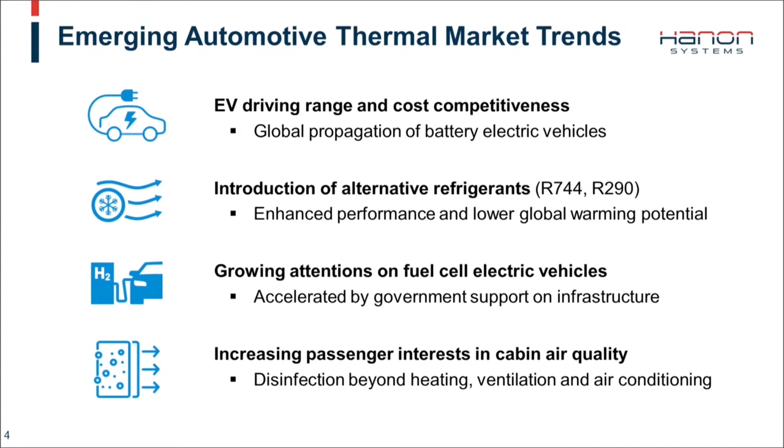Intra-city pollution and the recent COVID-19 crisis have significantly enhanced the public interest in cabin air quality, a field in which our UV LED photocatalyst technology will come to play.

Let me now use a couple of minutes to dive into the long-standing history of Hanon Systems in developing thermal management components and systems. I can look back on over 2 decades of conceptualizing and implementing product solutions that address the needs of automotive customers to meet the trends like the ones I just showed you in the previous slide.

Let's start with the green section, the heart of any thermal system in electrified vehicles, the e-compressor. As early as 2000, certain OEMs and ourselves already anticipated that the transmission belt would not be around forever. In the years to come, our Generation 1 e-compressor was used by over 10 customers for their initial electric vehicle concepts, with serial production starts as early as 2010.

And in 2013, the Generation 3 design was introduced with significantly more volume, followed by the enhanced Generation 4 design in 2019. Next year, we will launch the next generation of e-compressors.

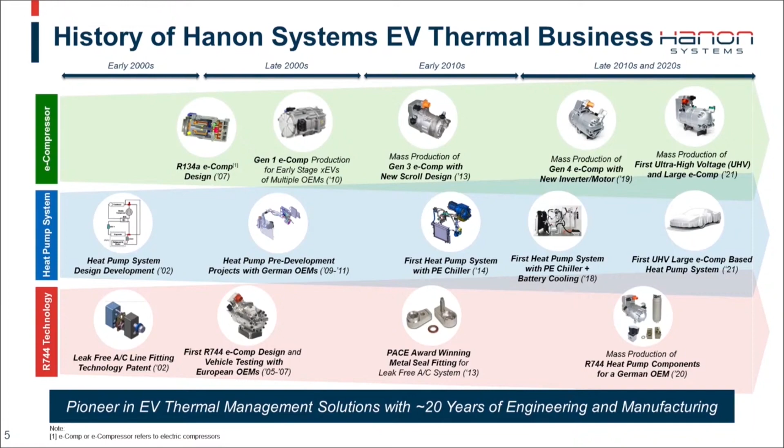Earlier on, I showed you our position in the overall arena of automotive thermal systems. Now I want to take some time and focus on our success with the heart of the system, the e-compressor.

Of the 4 key players I mentioned earlier, only 2 of them dominate the e-compressor market with a combined 67%, or 2/3 of that business. And it gives me special pride and joy to say that with 25%, we hold the lead in the non-captive segment of this dynamically expanding market.

When we look at what that means with regards to sheer product volumes, you can see that we will double our volumes within the next 2 years.

This is also due to the aforementioned introductions of the R744 e-compressor and the ultra-high voltage large displacement compressor. And by 2025, we will more than double our e-compressor volumes again, all the way up to 4.4 million units annually. So you see that the electrification wave throughout the automotive industry and our diverse customer base is showing its effect.

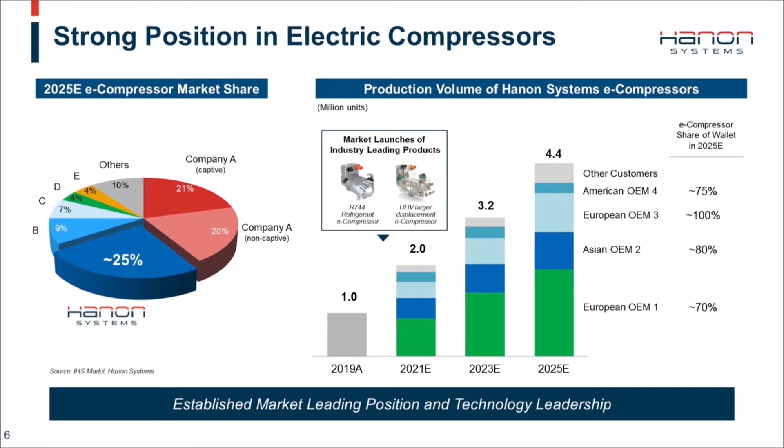Our team also did a fantastic job of developing and introducing the battery thermal management system on the Porsche Taycan, and the Mercedes EQC and Jaguar's premium vehicles complement the presence of Hanon Systems in Europe.

Traditionally, Hyundai has been launching its electrified vehicles with Hanon Systems components, and this customer is continuing to source thermal management system solutions from Hanon Systems for its battery EV dedicated platform, starting with the Ioniq brand.

Our solid presence at Ford, the increasing share of Fiat Chrysler's electrified vehicles, as well as the Rivian R1T and the Lucid Air demonstrate the acceptance of Hanon Systems thermal management expertise in the Americas region.

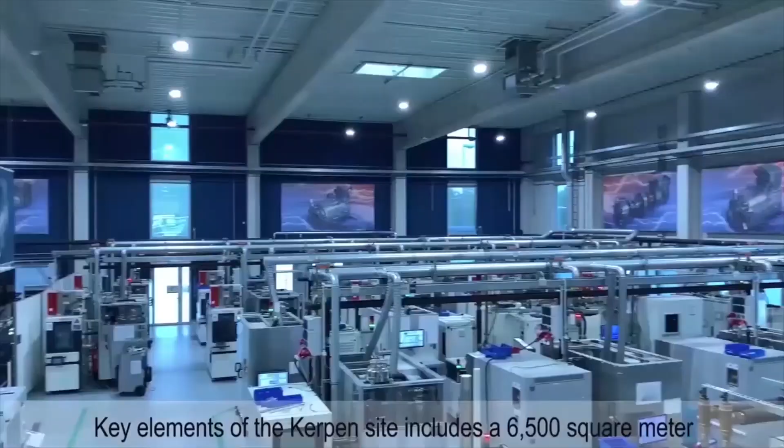Key elements of the Kerpen site include 6,500 square meters of component and system test space and a climatic wind tunnel for system and vehicle testing.

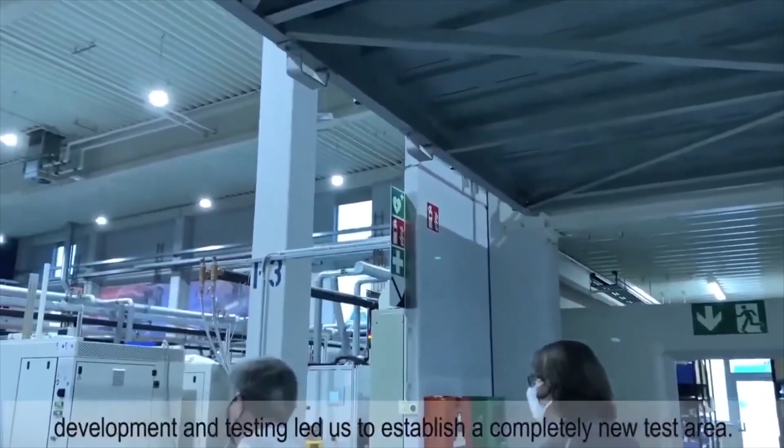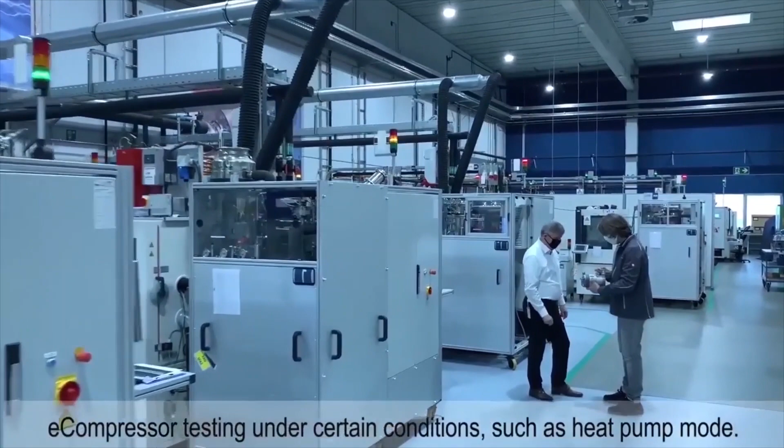Because of our success in e-compressors, the surge in demand for development and testing led us to establish a completely new test area. This was developed completely in-house to match the specific needs for e-compressor testing under certain conditions, such as heat pump mode. Because of the modular design, all stands are capable to run with all types of refrigerants.

Including R134A, R1234YF, R744, R290, as well as the various voltage levels that range from 48 to 800 volts.

By application of modern simulation tools and the latest acoustic analysis techniques, sound characteristics and noise level of systems and components from Hanon Systems are optimized from concept development up to vehicle-tailored solution.

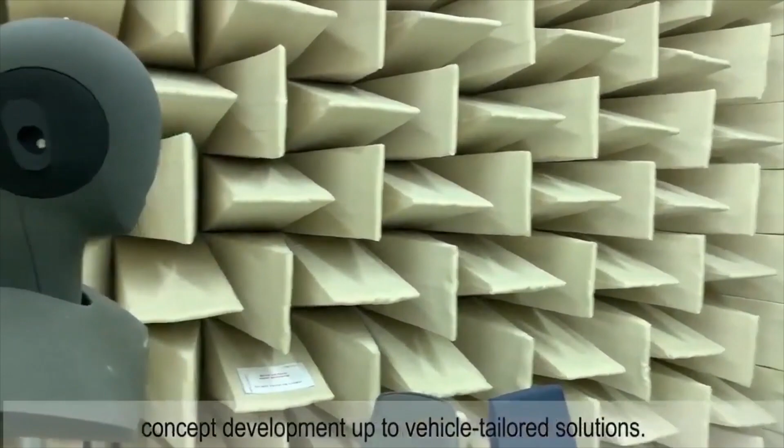Finally, the climatic wind tunnel is equipped with a 4-wheel chassis dynamometer, allowing vehicle speeds up to 250 km per hour. At the Europe Innovation Center, we are passionate in our efforts to deliver eco-friendly technologies that will help create a better world for future generations.

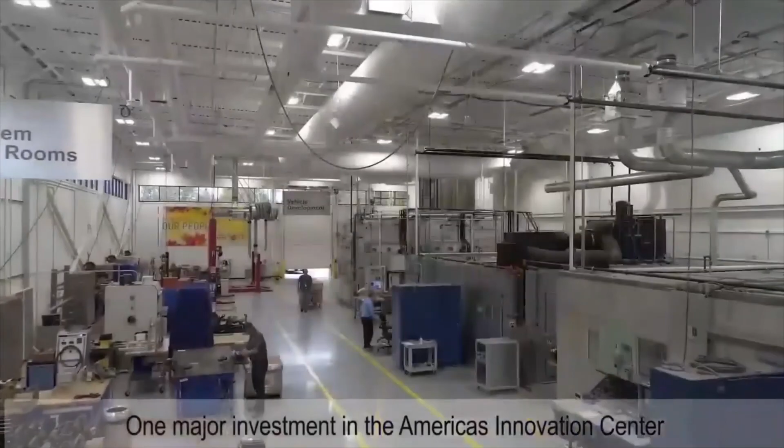One major investment in the Americas Innovation Center surrounds system-level testing. The system durability stands are capable of testing complete thermal management systems over the simulated life of the vehicle.

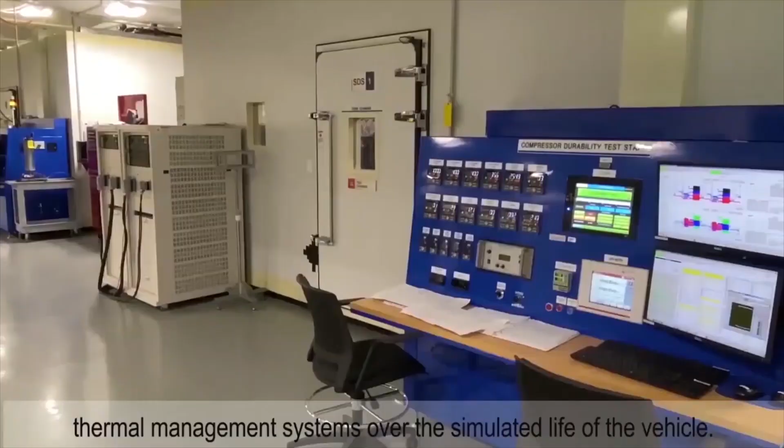We will also be launching a state-of-the-art system test room that will be capable to run a number of configurations, including heat pump and dual or multi-loop thermal systems.

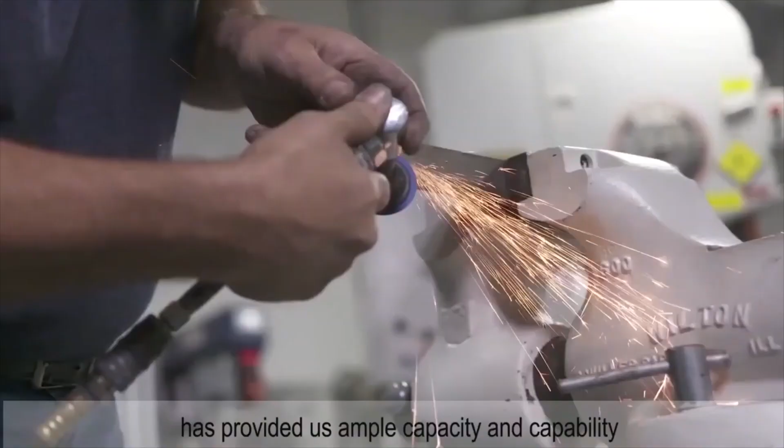Our work and investment on noise, vibration, and harshness, or NVH, has provided us ample capacity and capability to conduct all of our testing in-house for all product lines. Our test procedures are based on global correlation and standardization in order to have alignment across regions.

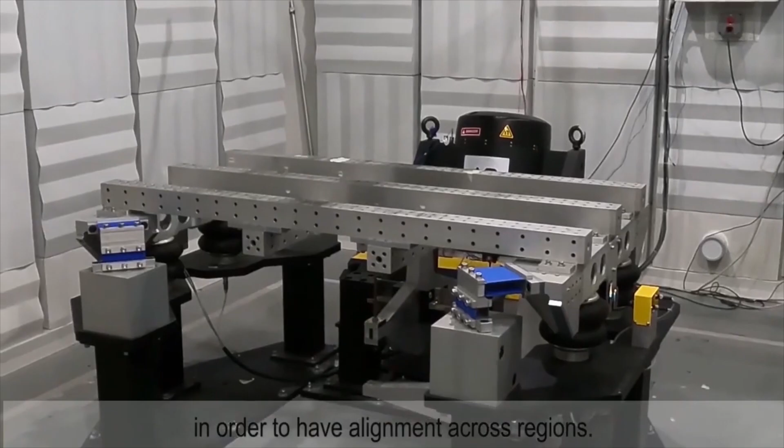In closing, Hanon Systems remains committed to focusing on high-impact investments to support the company's vision to be a leader in innovative thermal and energy management solutions.

In just a short time, the Americas Innovation Center itself and its people have proven our ability to improve on our expertise, execution, and delivery to really focus on the customer and their success. Thank you.

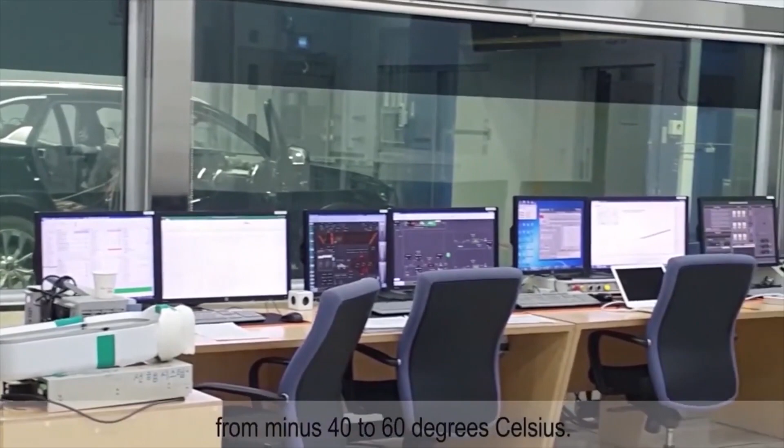It is equipped with a 4-wheel chassis dynamometer, fan capable of generating wind speeds of up to 250 km per hour, temperature and humidity controls, and solar panels to simulate sunrise and sunset.

Here at the Asia Pacific Innovation Center, we take pride in our effort to deliver automakers innovative thermal and energy management solutions and are driven to see our customer success.

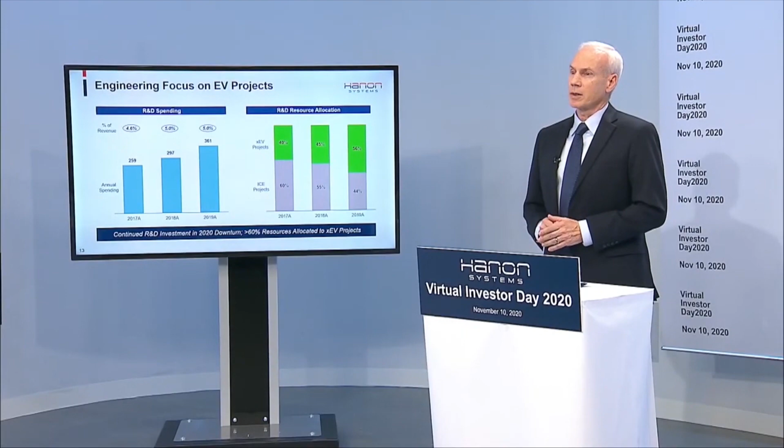Here we outline our engineering spend and resource allocation. The left chart shows our R&D investment increasing from 2017 up to 2019, and we're maintaining the engineering spending this year even through the market downturn.

On the right side, the chart outlines our engineering resources shift to electrification. We have increased from 40% of engineering staff working on e-mobility products in 2017 to 56% in 2019, and we project over 60% this year.

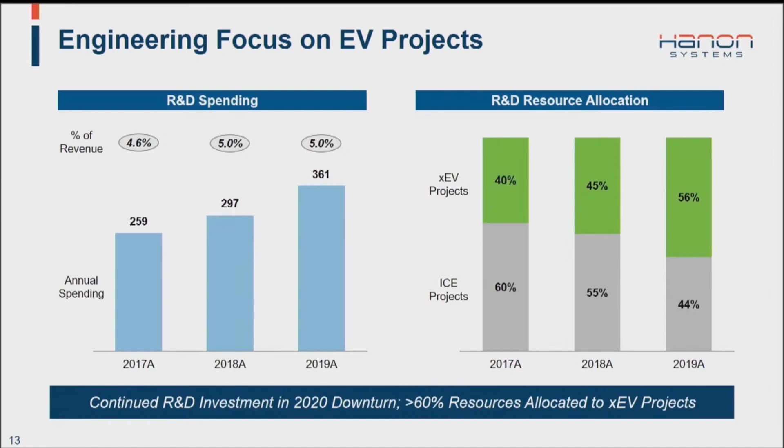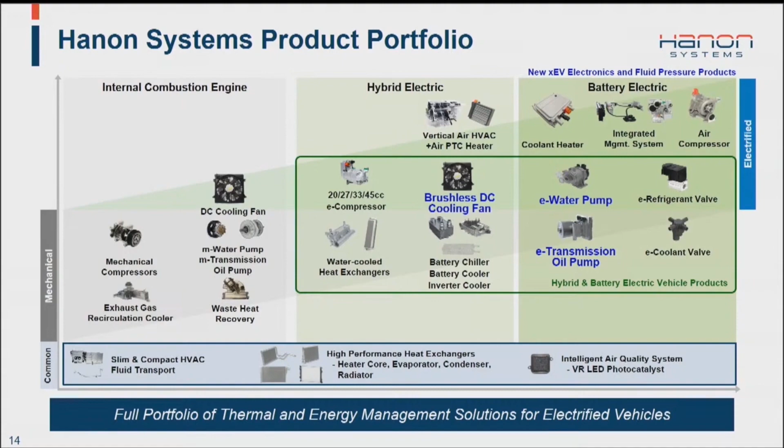We've added 3 new EV products, shown in blue, to bolster our offerings to the automakers. This includes the engine cooling fan with a brushless direct current motor, a complete electric water pump lineup, and electronic oil pumps. This makes for a full portfolio of thermal and energy management components for electric vehicles.

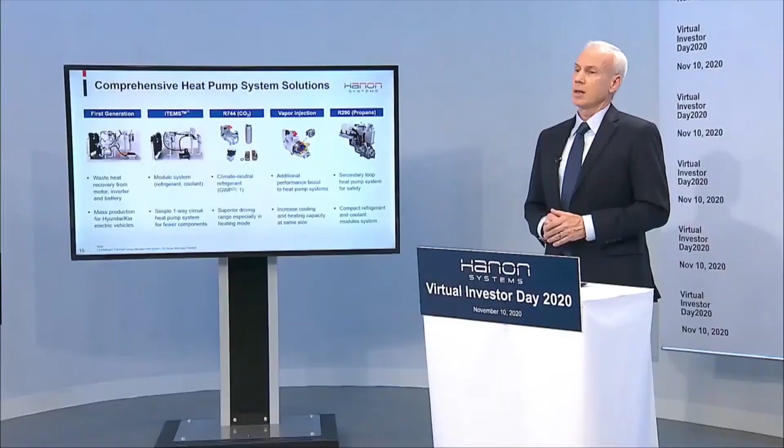We also have a comprehensive portfolio of heat pump solutions, starting with our first generation heat pump system, which has the attention of many OEMs around the world, and our one-way refrigerant loop system that uses fewer components, and our CO2 system, which Nerdal already mentioned, and our developing vapor injection system, which adds additional cooling capacity in nearly the same packaging size, and a new developing R290 system, which is propane-based and utilizes a secondary refrigerant circuit.

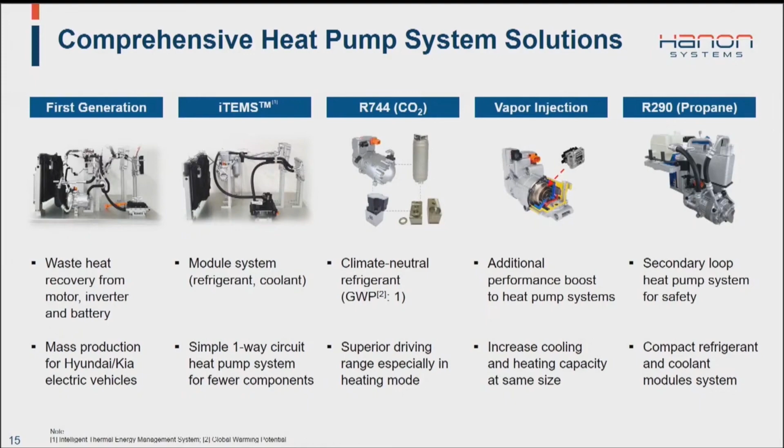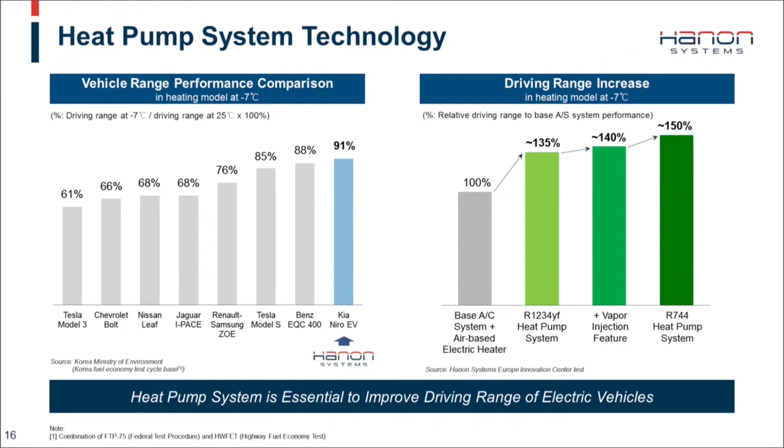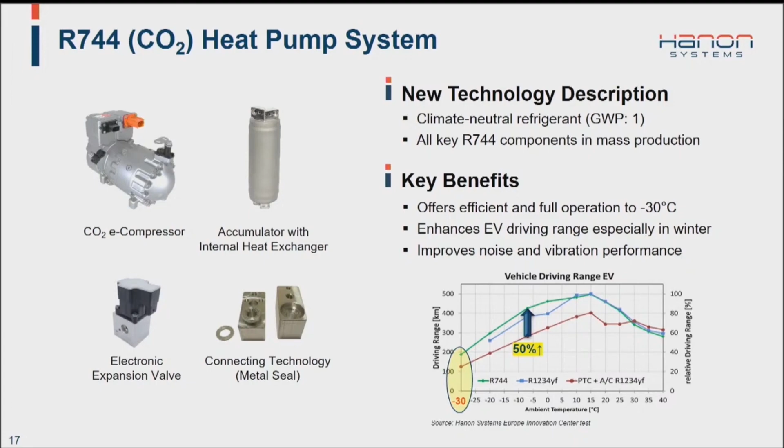I'd like to highlight our CO2 heat pump system, where we offer a complete portfolio of components. R744, or commonly called CO2, is a climate change neutral refrigerant. This system has outstanding heating mode operation all the way down to -30 degrees C, which can increase cold weather driving range by 50% over a base AC system. In addition, the E-compressor offers outstanding performance through its low noise and vibration design.

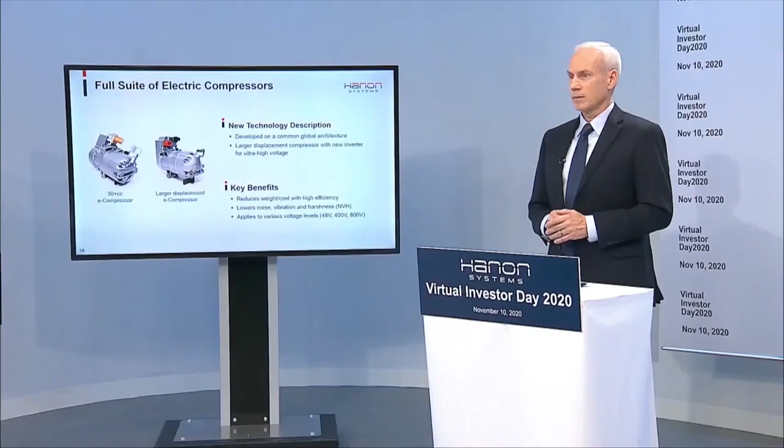We're also expanding our electric compressor lineup. In addition to the 33cc compressor, we're adding a new large displacement compressor to meet the increased demand for cooling capacity driven primarily by fast EV charging requirements. And we have expanded the operating voltage to include 48 volts all the way up to 800 volts to make for a complete portfolio.

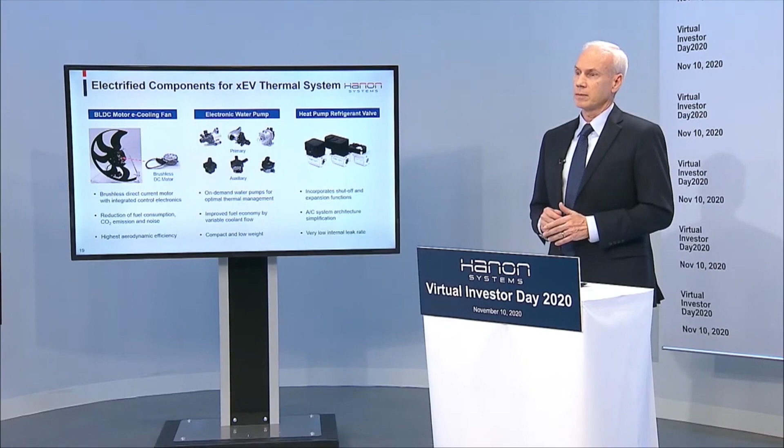There are three other technologies I'd like to highlight for electric vehicles. I mentioned on an earlier slide the brushless DC cooling fan motor. This reduces energy consumption, which is a key requirement on electric vehicles.

We've also added a full lineup of electronic water pumps, both EV auxiliary pumps from 35 watts up to 250 watts, and hybrid primary pumps from 250 watts up to 1.8 kilowatts. We also have a full range of highly advanced refrigerant valves that incorporate both a shutoff feature and expansion feature into one valve, and this simplifies the refrigerant circuit.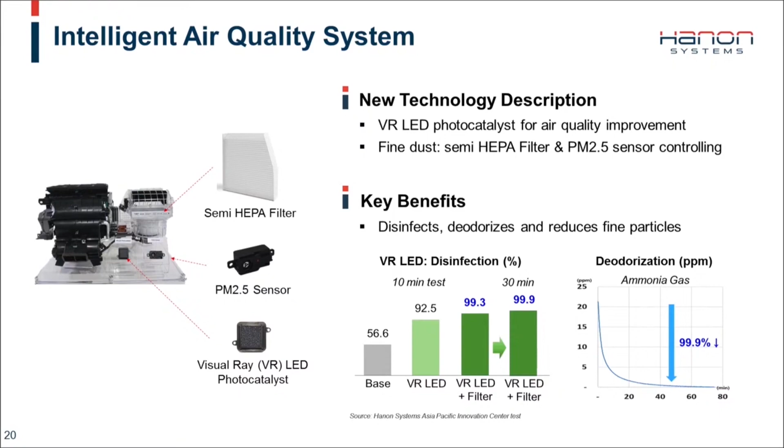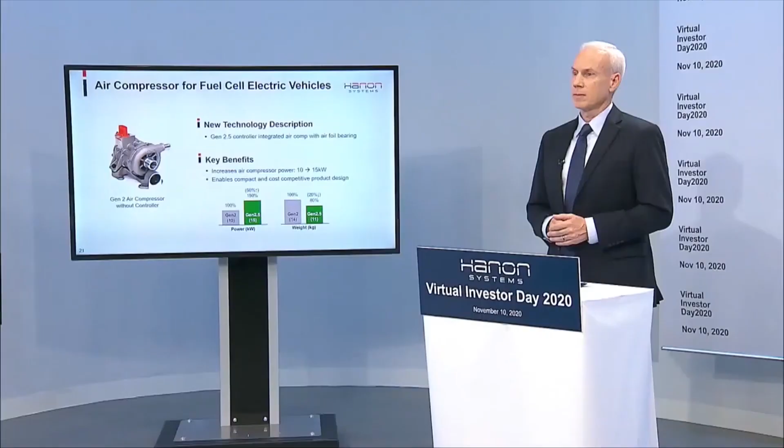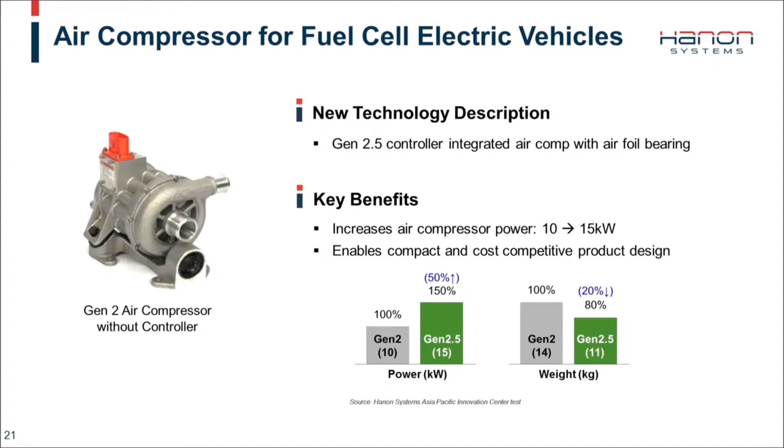Our fuel cell air compressor is in production and on the world's first fuel cell heavy-duty truck. We're now working on our Generation 2.5 air compressor that will have increased power from 10 kilowatts up to 15 kilowatts, and at the same time, we are reducing mass from 14 kilograms to 11 kilograms. The result is a high capacity and very low mass air compressor.

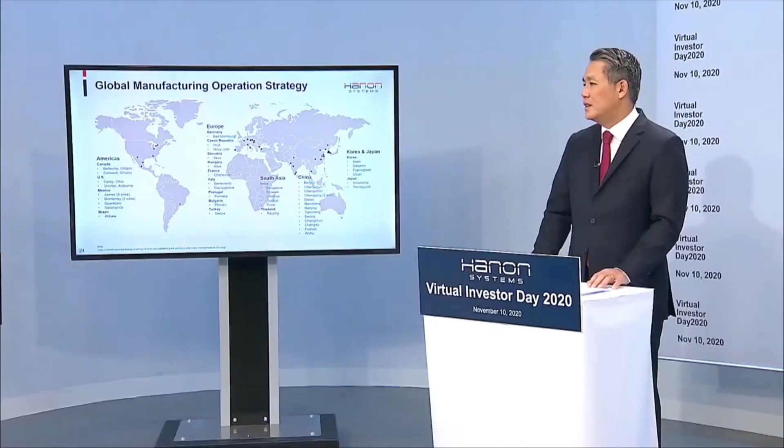First, recapping on my manufacturing discipline of the footprint in 4 pillars, that's on the screen. There are as many as 51 manufacturing sites around the world producing different product lines. Since the separation from Visteon, we have been focusing on expansion of new sites in line with growth, while restructuring and right-sizing some of our legacy plants, which we have updated you on many times in previous engagements.

This time, I would really like to introduce our activities around the electrified product expansion, as well as transformation of the existing manufacturing sites based on the increasing demand of new products going forward.

Obviously, electric compressor is a critical one that's leading the technology shift, and also requires significant capex, especially in Europe and China, for the expected growth.

As for Palmela, phase 1 is completed, and it's already preparing for phase 2, given the sold out of the installed capacity and increasing demand of higher tech versions, such as ultra-high voltage and R744.

Primarily for the European market. If you look to Asia, mainly China, we've also installed 1.1 million electric compressor capacity in order to support the local growth.

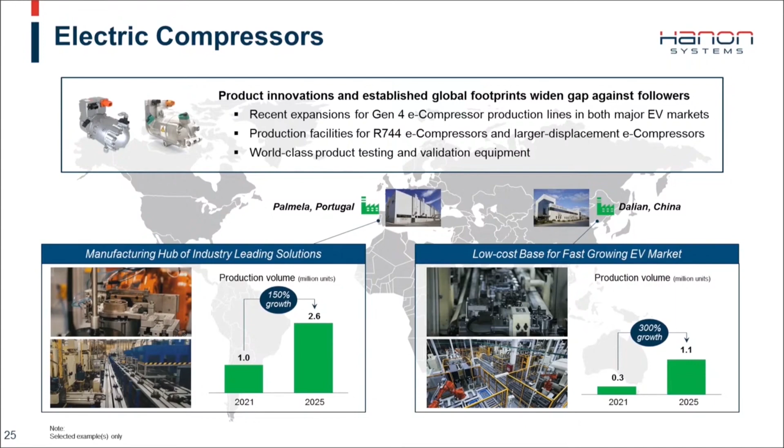But as always, the process and setup is fully optimized for the local economics, while the critical processes are completely identical across the board in all of our compressor manufacturing facilities.

Next is the other key growth area for both ICE vehicles and EV vehicles, including hybrids. This is obviously the area that Hanon Systems was lacking, but we closed the gap by acquiring Magna FP&C, now Hanon Systems EFP product group.

Early in 2019, we had started installing additional capacity for Hanon Systems immediately after the transaction, not to miss the last window of the initial wave of the BLDC shift.

That's already paying out as confirmed growth through 2025 and still winning more volume given the synergy of Hanon Systems' legacy fan and shroud with the new BLDC motor, and it is further expanding as part of the China market growth out of our Changzhou plant.

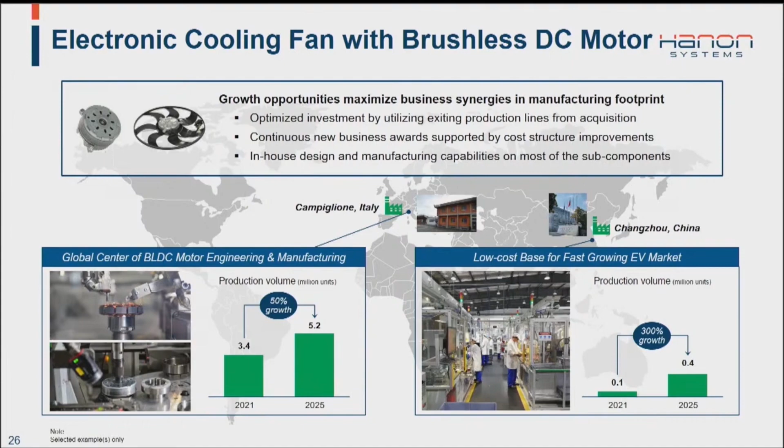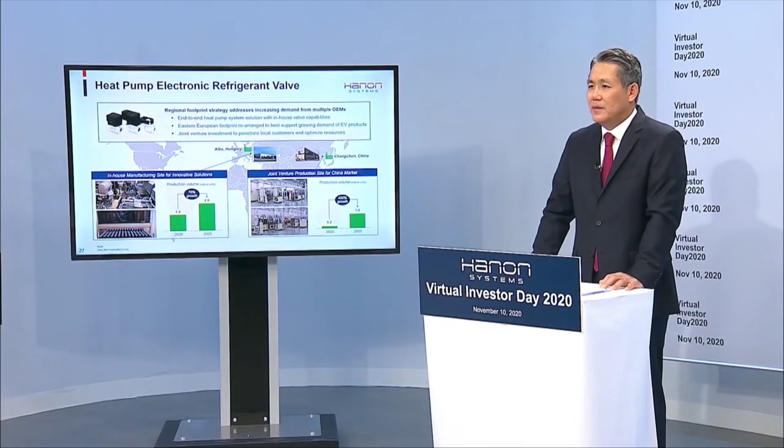Lately, there's a huge recognition of the heat pump system, and we're very proud of the new valve technology, which will be introduced first from the Alba, Hungary plant, leveraging off of the precision machining and assembly expertise in that plant, as it requires highly sophisticated controls in order to produce good quality parts. That's why we expect to have strong market leadership for a very long time.

Just like the electric compressor business, we have a strong penetration through a joint venture partner for the China market, and it's very strong in terms of local market demand.

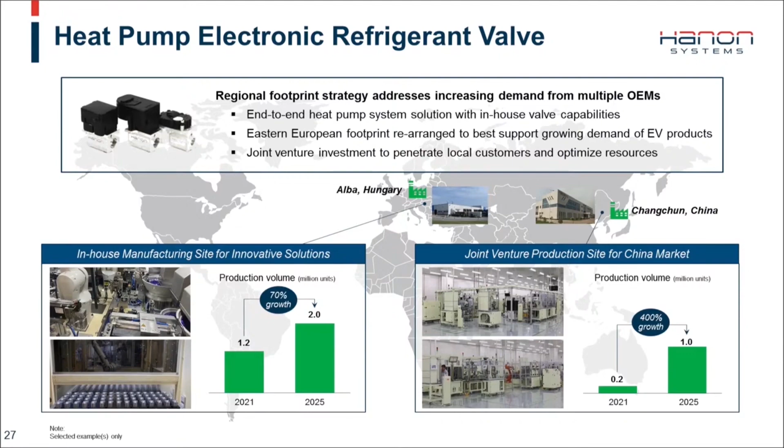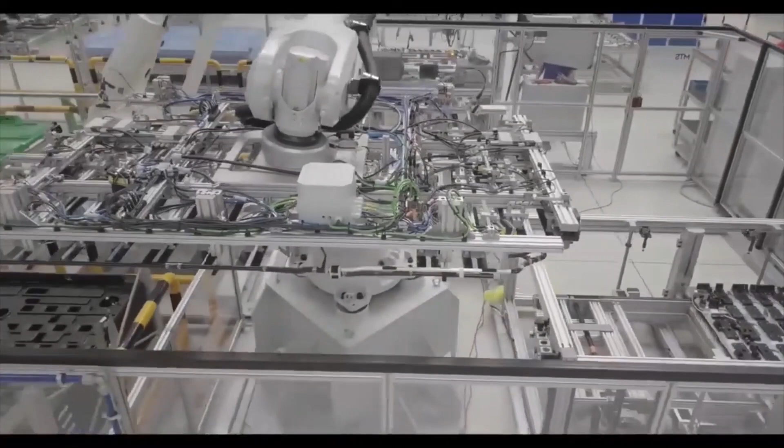Finally, I personally like these cases the best, as we have not only avoided restructuring, but also completely transformed the manufacturing plant to a futuristic setup for long-term viability, which otherwise would have faced continuous downsizing till closure.

Here's the video again.

Hello, I am Eduardo Treviño, Managing Director of the Hanon Systems EFP Monterrey in Mexico. You may know the EFP Monterrey plant was part of the fluid pressures and control business of Magna, acquired by Hanon Systems in 2019. I would describe the time that followed as a smooth integration for us.

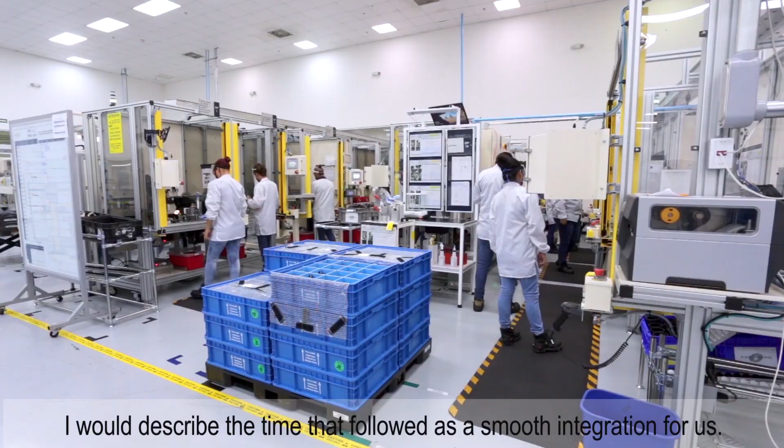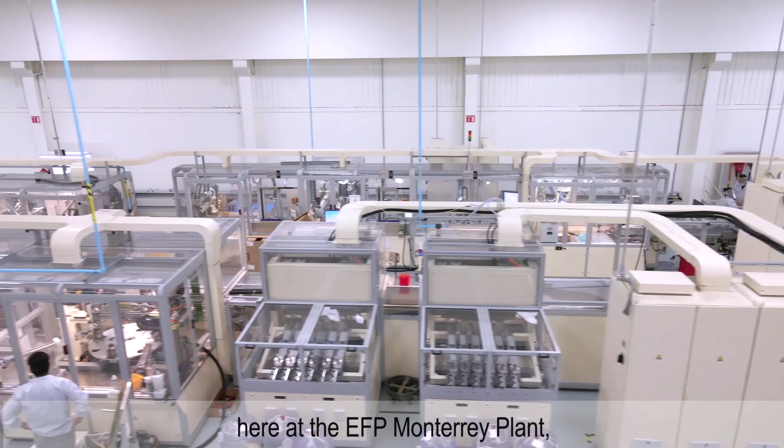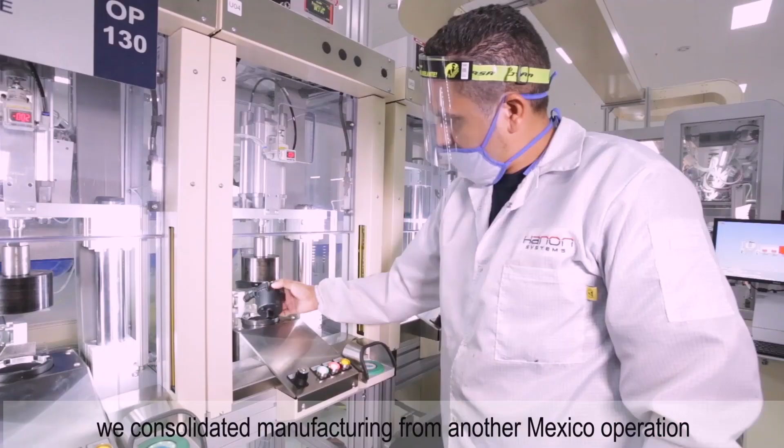We were able to quickly adapt to the new processes and systems with no customer disruption. Today, we produce and ship more than 5 million end items each year to many of the world's major automakers. In the short time since we joined Hanon Systems here at the EFP Monterrey plant, we are experiencing a transformation to our operations. Where originally we were focused almost solely on mechanical solutions, we consolidated manufacturing from another Mexico operation that allowed us to accelerate our transformation into the regional hub of electronic water pumps with our strategic investments to support electric vehicles.

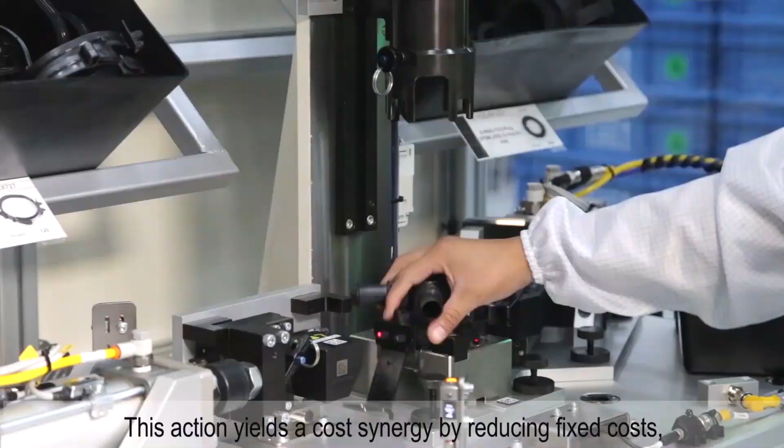This action yields a cost synergy by reducing fixed costs, allowing us to achieve economies of scale, and generates more than 200% increase in electronic water pump production over the next 3 years.

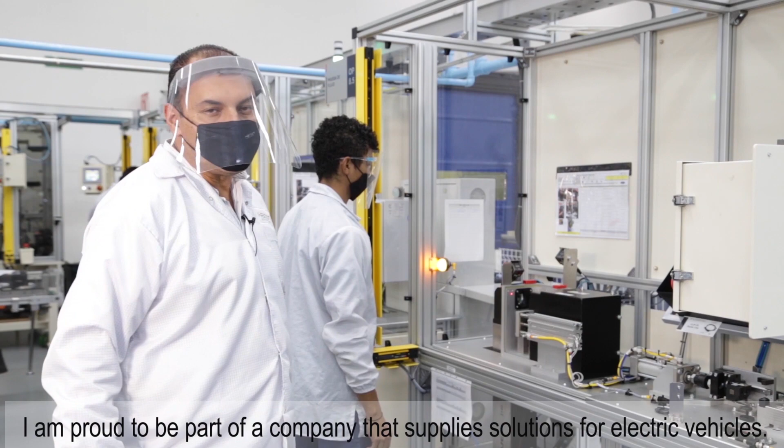I speak for everyone here at the plant when I say, I am proud to be part of a company that supplies solutions for electric vehicles. It is rewarding to know our efforts are helping the environment and building a better future.

Certainly, I saved the best for last, and it is Charleville, France, the last Ford legacy plant in our business portfolio. This plant has been on our closure list from Ford, Visteon, and Hanon Systems till just 4 or 5 years ago. But now it seems like it's going to stay around us for a very long time in the future as it's transitioning from an old plastics molding and assembly at a very high labor cost to now efficiently automated for the EV battery systems manufacturing.

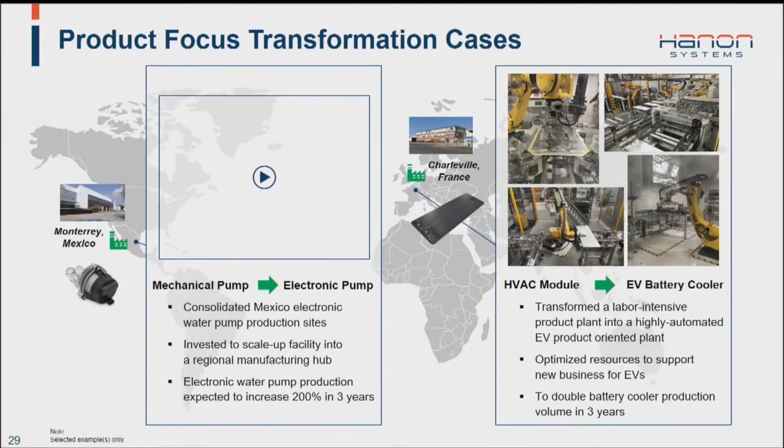So this wraps up the operational update, and thanks for listening to the operational section. I really appreciate your attention. And I'll turn it over to Subbu for the financial update.

Thank you, Min. Hello, everyone. I'm Subbu Nagasubramani, Vice President and Chief Financial Officer at Hanon Systems. Thank you for joining us today in this virtual conference, and thank you for your attention during prior sessions where our leaders talked about market forces, growth, product technology, leadership, and the transformation of our global operations. Here in this session, I will take you through the financial status of the company.

Before I get to the third quarter results, I would like to quickly recap as to how we got here. Looking back at the last 7 quarters, there are predominantly 3 major factors driving us forward. First, the acquisition of the electronics and fluid pressure business in April 2019. This resulted in significant growth in our business while also helping us complement our thermal product portfolio. This also helped us increase the xEV content. The resulting synergies helped us improve our competitiveness.